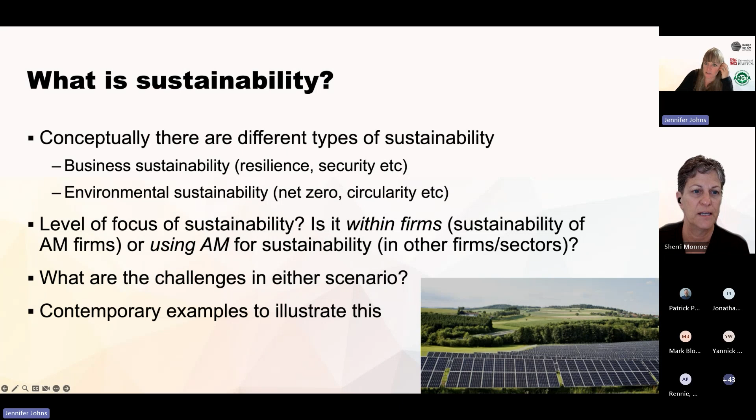I'm going to move on because we were also thinking about some of the challenges around this, and I think there's a certain inevitability about having to address some of these sustainability issues. It feels as if the world is on fire, but that doesn't necessarily always translate into positive outcomes in the business sense when businesses and sectors are under pressure. There's uncertainty around this, and there's certainly a lack of guidance. So if in any small way we can contribute to that and start a conversation around how we can have more meaningful conversations and debate around this, I think it would benefit the sector as a whole.

Sherri and I had a very interesting conversation around greenwashing, and I was very hardline, and I said, it's terrible, there should be no greenwashing. This is the term used by businesses who present green credentials that once examined quickly fold and are revealed to not be true. So there is this pressure on firms to present this sustainable impression. Sherry was actually much more encouraging. Go on, Sherri, you tell me your counter argument.

Yeah, so obviously greenwashing is an issue, when people are just kind of virtue signaling, oh, we want to do all these great things, but they don't really want to do it. I'm careful with the term greenwashing. I think what is one person's greenwashing is another person's just getting started. Sometimes you see companies going for that low hanging fruit, the easy things they can do to begin with, whether it's recycling water bottles in their facility or any number of things that some folks will say isn't really a big impact, but maybe it's just getting started and building a culture, getting people on board with thinking about things in this sustainable, more environmentally friendly way.

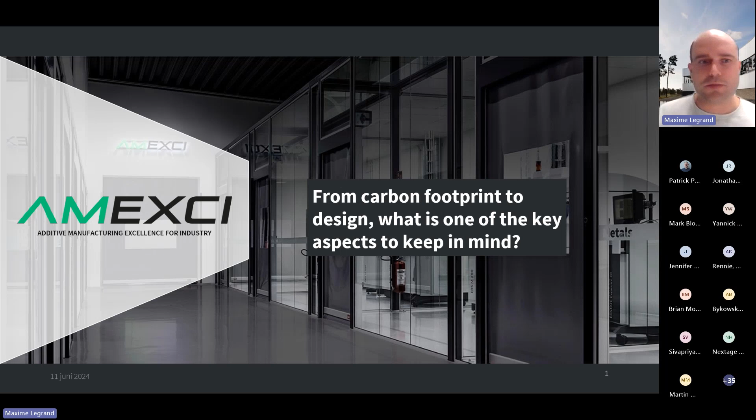I would say thank you first for this first hour, it was very interesting. So the theme here is about design and sustainability. What I'm going to talk about is, from the carbon footprint to design, what are the key aspects to keep in mind. But first, maybe a few words about AMEXCI and myself, for those who don't know who AMEXCI is. We're located in the Nordics, with the main office in Sweden, and another one in Finland.

So roughly 30 people, and we work with additive manufacturing. We have 3 different departments: one focusing on research, the second is the academy, which I'm part of. The goal of the academy is to train and educate people, basically help the customer walk along their AM journey, try to understand AM, find where to use it, etc.

So yes, that's where I've been working now for 3 years at AMEXCI as an innovation manager. And then the third department, which is the main one, is the production.

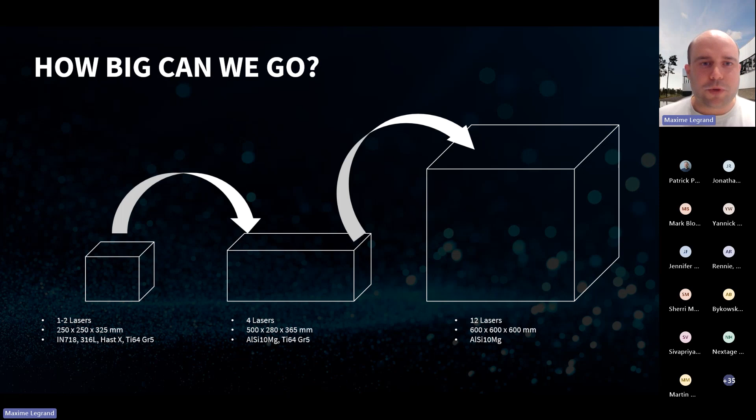I would say from the design and optimization process, and then prototyping, up to serial production. We have a few machines to help us on that, for smaller build envelopes, to print Inconel, 316L or Hastelloy X. Then we have 2 quad laser machines for aluminum and titanium. And we recently got a new SLM NXG with 12 lasers and a quite large build envelope of 600 by 600 by 600 to print in aluminium. So that was in brief what AMEXCI is.

So the goal I've set myself today is first to try to help you find some tools to help your decision in terms of environmental choices, not only based on economics, but looking also at other aspects. And then also to tell you what you should be careful about when you design for more sustainable products based on these tools.

So how to decide? As some of you mentioned before in the comments, the first question you ask yourself is, can I print it? Is it feasible? Which technology to use, etc. That's the first question. And then comes always the tough question, the cost. Should I print it? Does it make sense from a cost perspective, or on the lead times, the warehouse, etc. So try to find a bit the economical aspects.

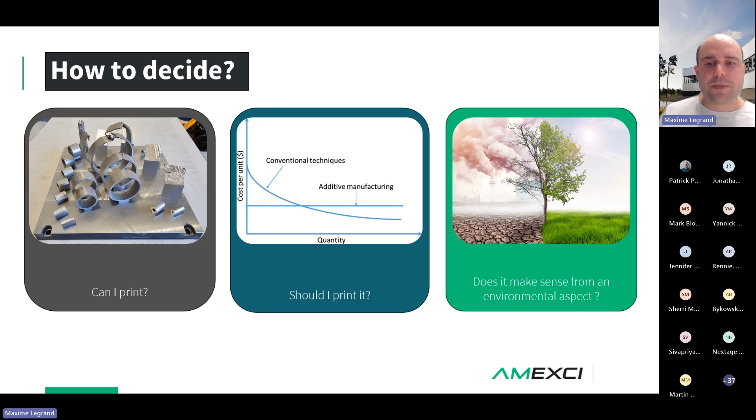But what we've seen start to appear recently is also the question: does it make sense from the environmental perspective? I would say that's also pushed by the oncoming CSRD, where companies have to do their own carbon reporting later on. That's oncoming. But to make sure it makes sense from an environmental aspect, we need to be able to measure it, to have some kind of LCA to measure that.

So life cycle assessments. I've highlighted a few companies in additive manufacturing that have LCA tools available. I'm not saying they are good or bad, I won't be judging, but just letting you know they are there, and you can at least get in touch with them to understand more. This list may not be exhaustive, it's just a few examples.

On the polymer side, there is BASF, which provides more materials in polymers. On the machine side, I know EOS also has their own tool for both polymer and metal, where you can measure the CO2 footprint of parts. Then also for both metal and polymers, we have these two independent bodies, AMPOWER and the Danish AM Hub, who've made some tools or studies on that.

And also, if we focus on metals, I found out recently that Aidro in Italy also has their own LCA tool. And at AMEXCI, we've also developed our own tool. Why develop our own? One reason is we found we need more data, more precise data, to be as accurate as possible.

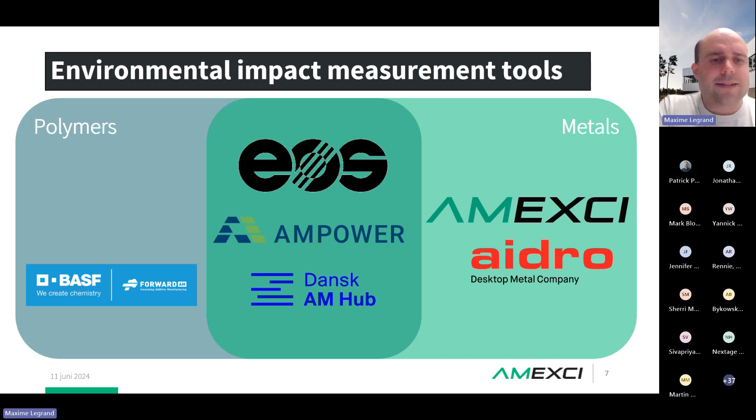So we started to do our own LCA, and that covers several aspects. We talk about circular economy, so several aspects. The first step is material extraction. That is covered by our LCA, but relies not on our own data, but on databases available online, etc. For that we haven't made measurements.

Then we have the manufacturing, and that's a key point of the LCA we've developed: we've taken the opportunity to put sensors on the machine to measure how much argon is used in the process, how much electricity is used in the process. So on that, we've made measurements, trying to be as accurate as possible.

Then transportation is of course covered by some database. The use phase is excluded because we don't have any power over that—the customer has more knowledge there. But I really encourage you to look into that phase, because that's usually where you can get the most benefits, if you think about weight saving and a part being transported from one place to another—the less weight, the less energy required to move it. So even though the usage phase is excluded, I really encourage customers to look into that. And for now, the disposal is also excluded.

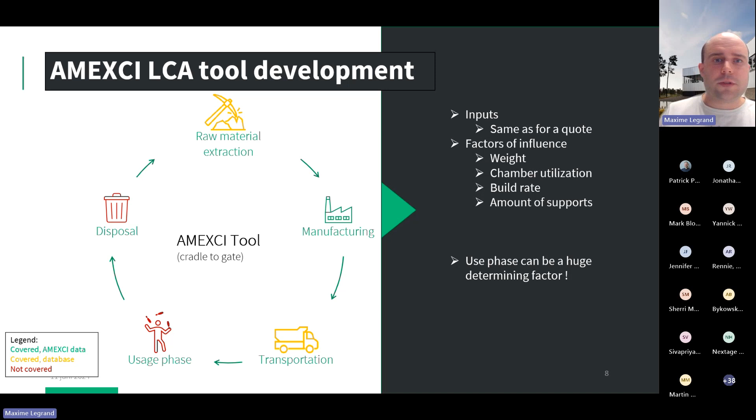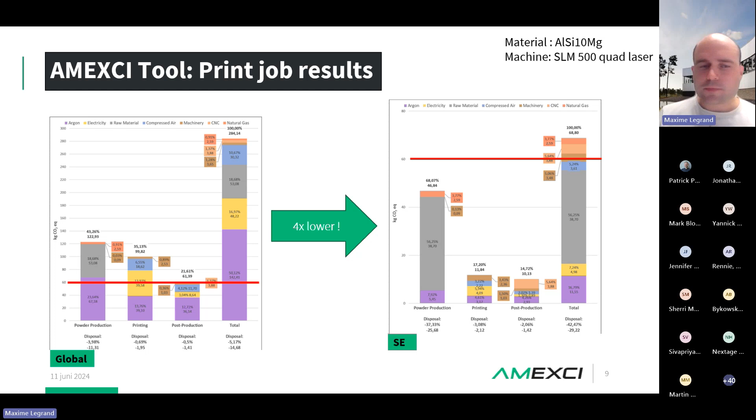But let's look a bit more at some results. So we did a print job. I cannot show it to you because this one was confidential. The material was aluminium, printed on our SLM 500 quad laser. From that, we used the tool that we developed and took the hypothesis of a global energy mix, and then we did the same with the Sweden energy mix. And we went down from around 280 kilograms of CO2 equivalent to a bit less than 70. So 4 times lower. So how is that possible?

For those who are maybe not so aware, Sweden has a very good energy mix, a very highly decarbonized energy production. So that's one learning from this: if you produce locally, in countries with this good energy mix, then you're already making quite intense savings there. So produce locally, and you get a nice energy mix, and also save on transportation costs. You don't need to transport using trucks, boats, or planes to somewhere else in the world.

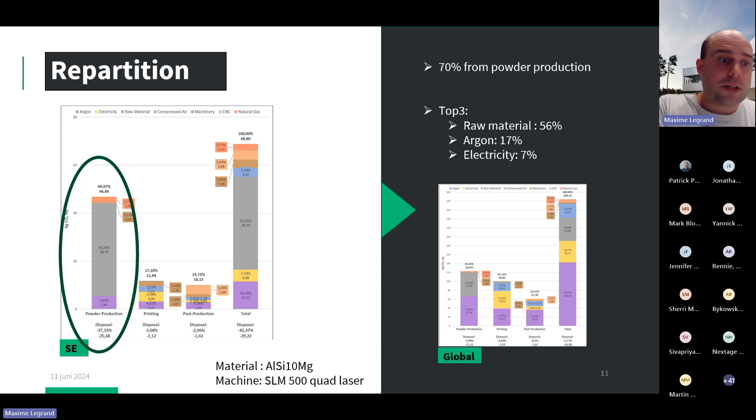And then if you look a bit closer at the Sweden graph, you see that the powder production accounts for roughly 70% of the kilograms of CO2 emitted. And if you look at the column on the right, you can see that raw material extraction is the main aspect there, accounting for roughly 56%, while argon and electricity are much lower—17% for the argon and 7% for the electricity. But if you jump back to the global one, you see that argon has a much higher impact there because of the way it's produced, maybe using coal, etc. So that depends a lot on where you produce. You have to be very careful about that—the results you have in one country will be different in another.

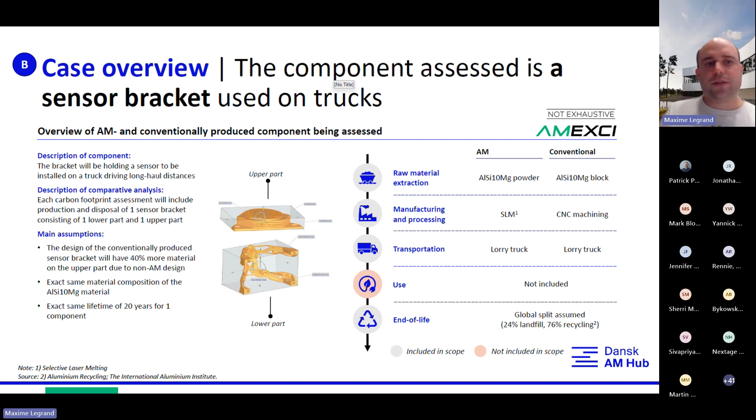But I wanted to say you don't have to trust only our tool on that. We did this work before with the Danish AM Hub, and another company specialized in LCA. They did all of this work based on database, and went through the same steps, more or less—raw material extraction, manufacturing, transport—and then they added also the end of life. That's to produce this bracket that you see there in yellow, and it was estimated versus a machined one. Of course, if you machine a block of 10 kilos of aluminium versus printing a part of 1 kilogram, you will see a huge difference in terms of carbon footprint. So this showed that in that case, AM was quite interesting because it saved a lot of material.

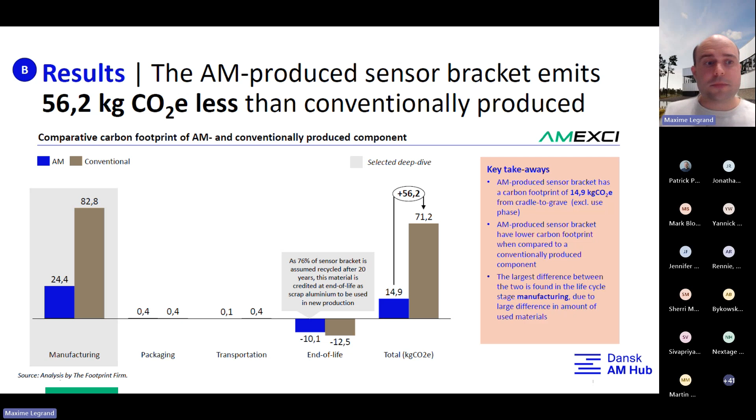And I don't know if you remember what I told you—with our tool, we got roughly 70% from the powder manufacturing. That's something you can see here also. Again, here, the powder accounts for around 75%. So this analysis also confirmed that the manufacturing of the powder is a major contributor.

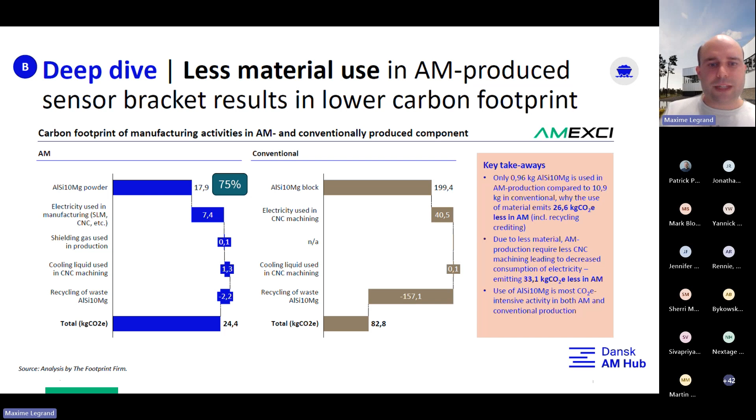So what to take away from that? Use as little material as possible. Try to be resource efficient. That will benefit you in all aspects: you will decrease the printing time, in a simplified way, you will also decrease the cost of your part, and you will also then lower the environmental footprint. So that's quite an interesting way to do it—try to use as little material as possible.

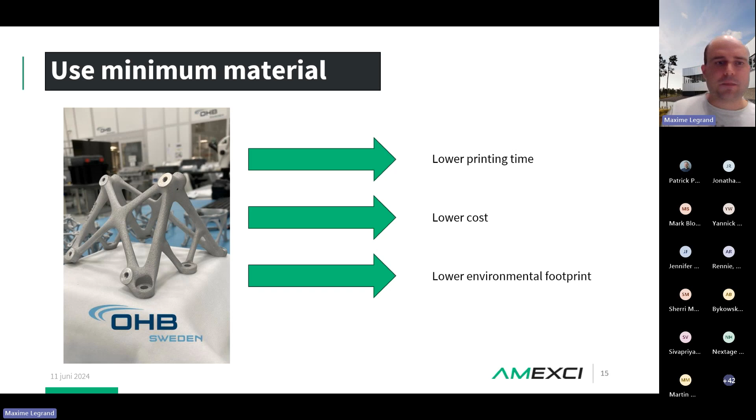So maybe for you to take away, there are some tools starting to be available and developed to estimate the kilograms of CO2 emitted when producing the AM part. Not so many yet—it's just the beginning, and I hope there will be more in the future, to be able to compare the data and make sure we get good results, etc. Don't hesitate to check with the local supplier what he has in his pipeline. And maybe it seems a bit obvious, but it's still important to know that minimizing the amount of material used is a sure way to minimize both cost and the environmental impact.

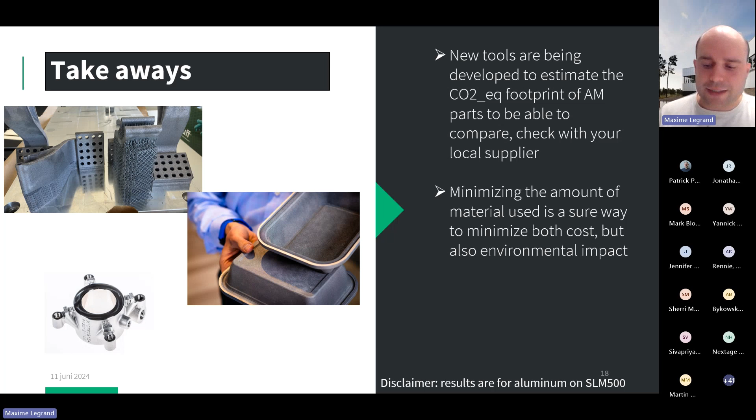Yeah, great presentation. Really good analysis that you all have done there. Opening this up, do we have any other questions?

Well, I'll throw a message or a question out there. What areas do you see that we need to get more primary data, or were you able to get data throughout that path, or was that still part of the challenge for you?

So from what I see, at least what is missing more on our side is we see that the material has a big impact, but for that we still rely for now on database. We don't have the data. So better information on the material, the powder production, would be a very good way to start, I would say, or to improve.

Excellent, excellent. Any other questions? Chris said, 'Wow, I need to go reevaluate our argon numbers.' Yeah, it is.

Go ahead. I was just going to follow on because your question preempted mine, really. I was really interested in what you were saying about the usage phase and having data from your customers. So it sounds as if you've done a lot of work internally around the numbers, but externally getting the data in is much more problematic. Is there any route to getting that data from customers, and how would you go about it?

Sure. Thank you, Sherri. I hope you can hear me. You can see the presentation. Yeah, amazing. Merci beaucoup, Maxime. And thanks for AMEXCI to start the presentations. Say hi to Merve and Manya also from my side. And let's kickstart. So now we go from a platform like AMEXCI with multiple technologies to 9T Labs.

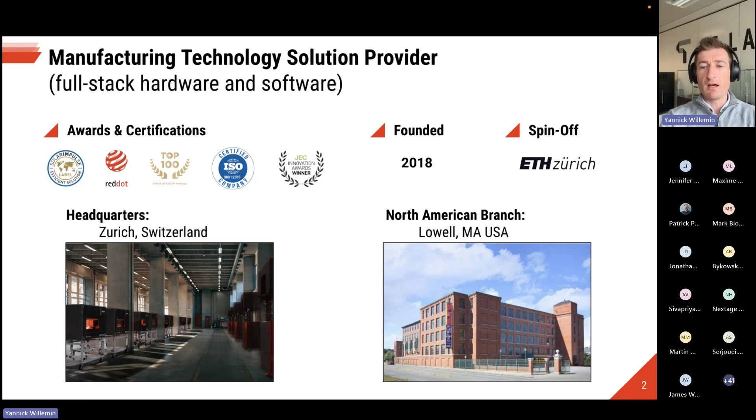So who is 9T Labs? Just very quickly, we are a young company, I'd say, founded in 2018 as a spin-off of ETH Zurich. We have our main site here in Zurich, Switzerland, with 40 people, and we have 5 people in North America, near Boston. And basically what we do, we started with the goal to really advance high performance applications. I will show an example afterward. But we really put a focus on sustainability, because nowadays, if you go into a factory for metal parts, you will see it's highly automated.

When you go into a factory for composite parts, which is normally associated with high performance, we know it from sports, from aerospace, you'd be surprised how many people are around and how manual it is, and tedious often. We see a point to make high performance materials in a high performance manner. The question is how can we make applications more sustainable without compromising this mechanical performance, which is mainly the goal of using these materials.

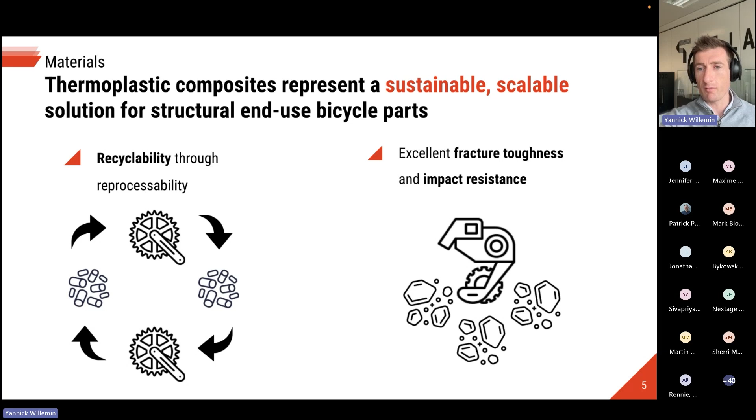On the material choice already, because there are different types of resins - a composite is a mix between fibers, in our case continuous fibers, and the resin. We are selecting thermoplastics because they have an advantage when it comes to recycling, or even during production, to keep the sustainability point, but also the scalability point, because we're using additive manufacturing for serial part manufacturing, a somewhat non-obvious use of 3D printing. Recyclability is a big topic by reprocessing material, end of life, or production waste material. And keeping the high performance is key for customers selecting this material, especially when substituting metal parts to get lighter parts at the same performance.

So that's in a nutshell what we're doing. We work on several pillars. We start at the digital pillar - we have software where, based on load case and geometry, we can define where to put these continuous fibers, which are very important for performance, but are also bad from a cost point of view and eventually an environmental point of view, because these carbon fibers mostly come from petrol-based materials and require a lot of temperature to get carbonized - that's why we call them carbon fiber - to reach their final properties. So we use them when they add value, but don't put them everywhere.

Then we can simulate and validate those parts in this digital environment, which is already part of making a product less negative, less impactful on the environment, because we don't have a physical item yet. Once it's verified, we go to an additive manufacturing step - that's one of the 3D printing pillars we're using, why we are here today. Here it's really about hitting the automation topic and the no-waste topic.

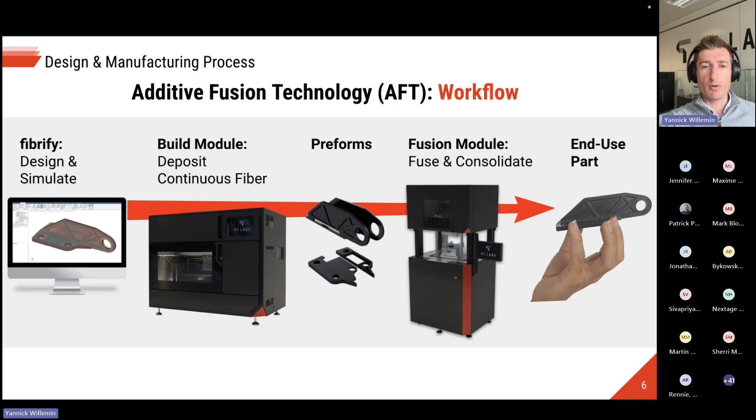So here we go - this is a rocker link for a motorbike, the link between the chassis, the suspension system, and the rear axle. We get this part in aluminum - this is how it is on the motorbike today. Based on the load case and the geometry given by the customer, we decide where to place these continuous fibers. As you see, we don't need a lot of them for this load case, just these two loops very precisely.

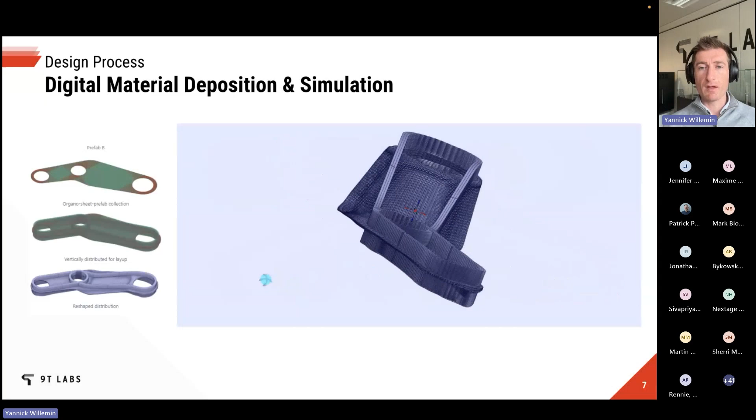And then we can even hybridize it with some other materials - can be short fibers to fill the volume, short fibers coming from waste streams, and also here an organosheet in the middle for torsion stiffness. So we place this digitally, and we can test it both for processability and for the end use case.

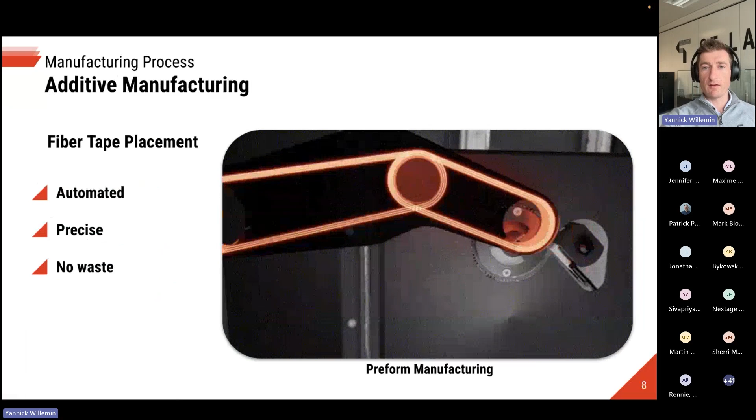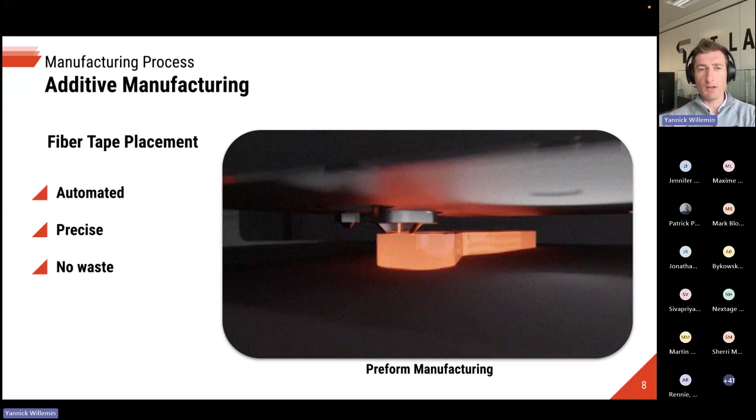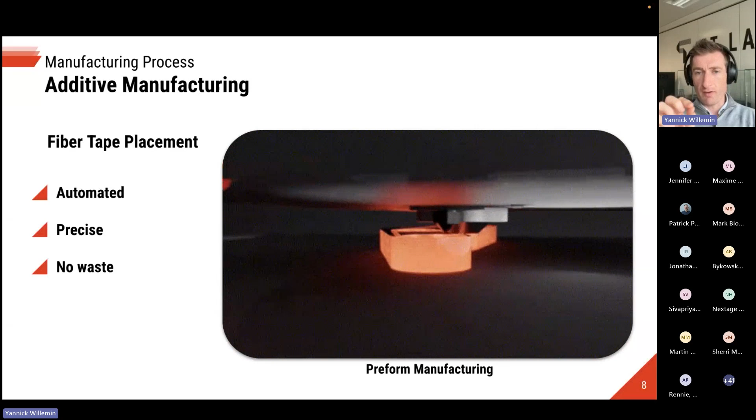Obviously once it's validated, we send it to the printer. The printer's goal - what we're looking for with 3D printing - is not to get a part that's perfect coming out of the printer. We want a very automated way to precisely place these continuous fibers without producing any waste, so we don't want cutouts or milling afterward. We do this very precise deposition here, and the end product is a preform.

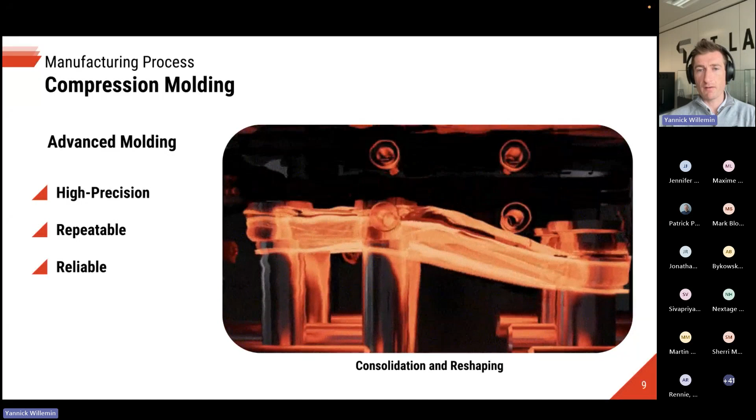And this preform afterward goes into a molding step. We go for high volumes, between 1,000 and 100,000 parts - we believe it's also a way to have a bigger impact, because we have 100,000 parts out there versus single parts here and there. Why we do molding is really to have this high precision - the highest characteristics for this type of material, the repeatability on tolerances and quality, and very reliable parts. Here we maximize the steps within one process - we consolidate the part, we reshape it, that's also an advantage of thermoplastics.

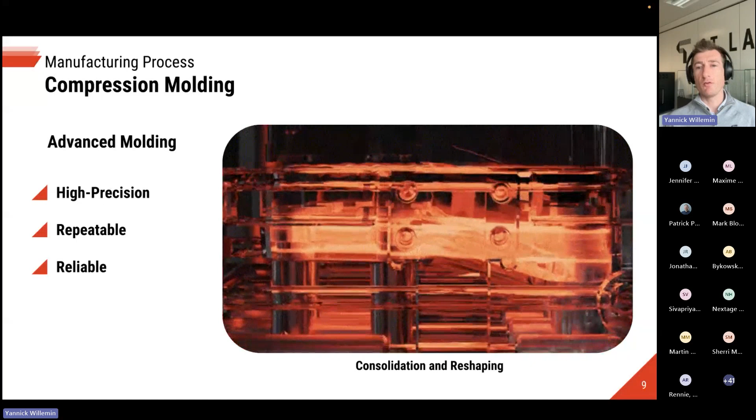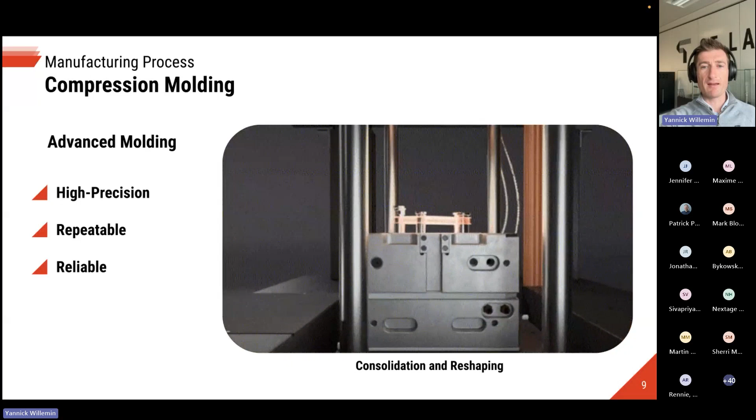And we can integrate metal inserts, which is often necessary for the interface, as a rocker link would interface with ball bearings and so on. So here we have the 2-step manufacturing. We add a 3rd step, which is the digital manufacturing before that. As I said, what we do is using 3D printing in a hybrid way. The goal, obviously the trigger for customers, is to reduce weight, which in the use phase has a major advantage on reducing consumption, increasing payload, whatever the incentive. We have that with 0 waste, which must be combined with cost competitiveness, because we are going for serial parts and often substituting metal parts like aluminium, where the business case is pretty tough when we look at cycling or aerospace.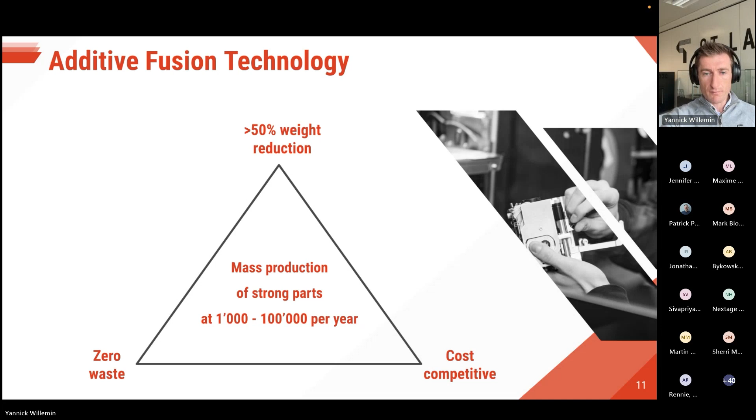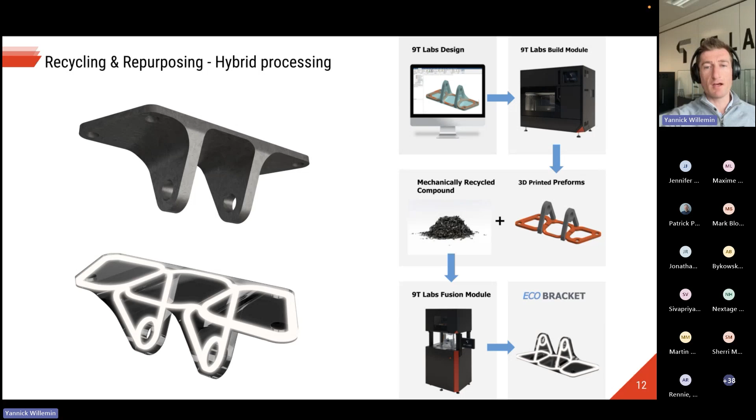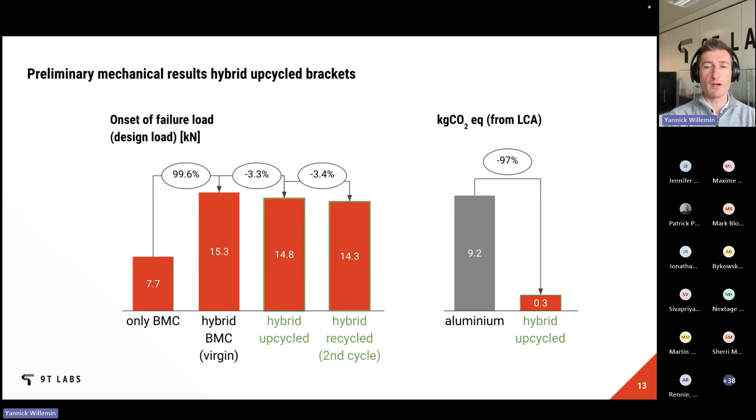And we did an LCA here with the university using commercial software in this field, comparing the aluminium parts with our concept. You see there is a dramatic reduction also on the kilogram CO2 equivalent, thus demonstrating that the concept, both in production and in use, has a major impact.

So yeah, in a nutshell, that's what we are doing now, and I'm glad that you listened, and I'm happy if you want to ask questions, challenge some of the assumptions. Your turn.

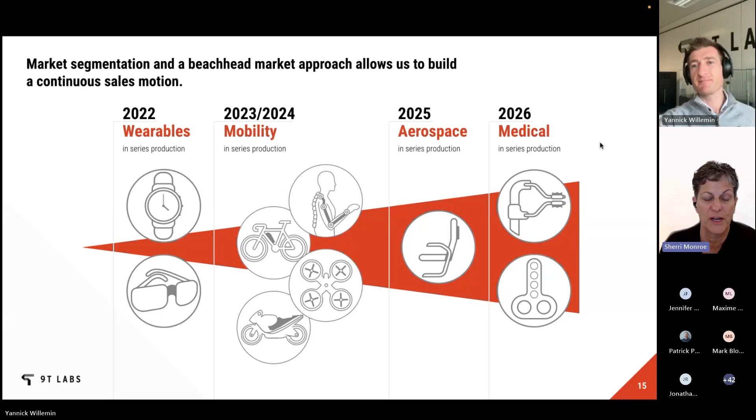Yeah, thank you. That was a really great presentation. What you guys are doing is really pretty remarkable in the impacts this is having, especially from your analysis there. What other kinds of, when you were talking about some of the wastes going in there, what other kinds of wastes are you able to make use of?

There's different waste streams. There is virgin waste, which would be at the material producers when they produce, for example, UD tapes with continuous fiber pre-impregnated with resin - they are always cutting 1 centimeter left and right, so this is very clean waste, we have no issue requalifying it. That would be option one. Second option is cutout - when a producer is buying these textiles and cuts out some of the surface, that would be reprocessed, also clean waste. The third case is end of life - we also took these brackets, shredded them, and repurposed part of them. That would be the third option.

Very interesting from the pitch, but very difficult to apply in aerospace, because qualifying a material end of life is pretty tricky. But for sport application it also has a nice case, I would say. So sports and luxury would be interesting. Aerospace is always tricky for whatever comes to recycling, because you also need to guarantee waste over 10 years, which is kind of counterintuitive.

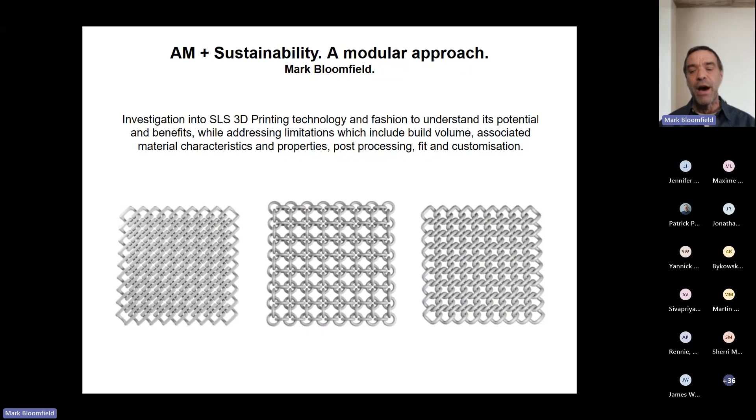It's also, once you've figured that out, how do you actually make it fit somebody? And when they try it on, how do you handle their questions when they ask, 'oh yeah, well it's nice, but it's a bit tight here, can you just let that out a bit?' So there were all these challenges we needed to overcome. One of the initial things we did was try to compress a pattern of a theoretical garment using physics to fit into the build volume.

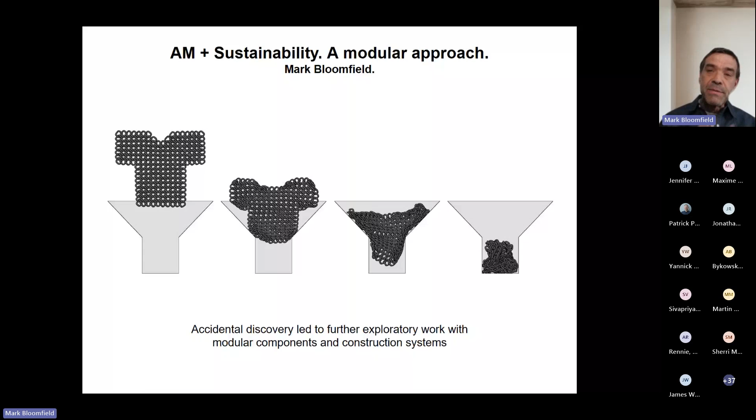So this works, it's something software can manage and do. But we had a problem because some of the links had failed in this simulation process and were no longer linked together. I was looking at it thinking, that's a waste, I've not got to throw that away. Then it was, well, maybe if I could just put these two links back together, click them together, that would solve the problem. So that's how Modeclix was kind of born.

I hasten to add this wasn't a sustainability project, it was really just looking at whether or not we could print clothing. The sustainability came as an afterthought, really, because we started to play with this and develop this link, which you can see on the screen. It's open on the back, so it just means these kind of small clover-like links can be linked together.

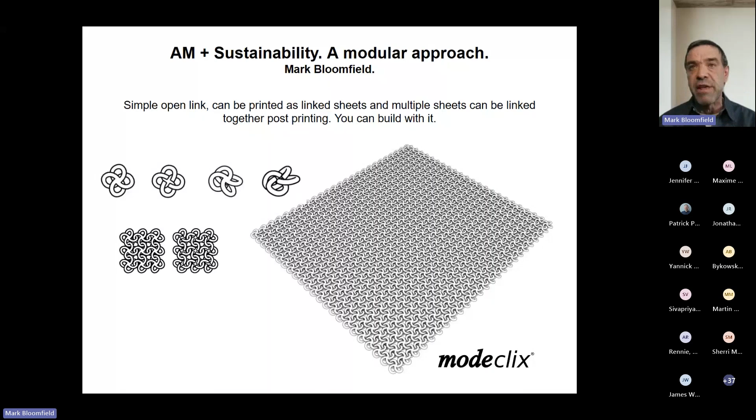They can be printed as linked sheets, so we could print large panels that just come out of the machine, shake them off, get rid of all the powder, put them through a vibro finishing process, and then start linking sheets together. So you can start actually building much bigger things with it. This is one of the first things we actually built.

Each of them have different body shapes, but we've not had to take the whole dress apart. We can literally just take links out and reshape it so that it fits pretty much anybody. So it began to introduce us to this idea that this was something we could tailor, and we could tailor it over and over and over again.

It was really fitting that whole circular economy model, whereby the material itself is something we can just print, and then continually find new use for. We don't ever have to throw it away because we can always reuse it. We then figured we could make new parts that could fit into this concept, so that we could expand its capability.

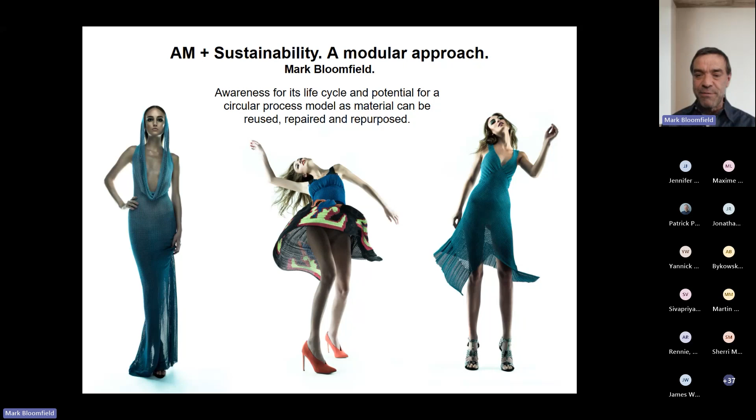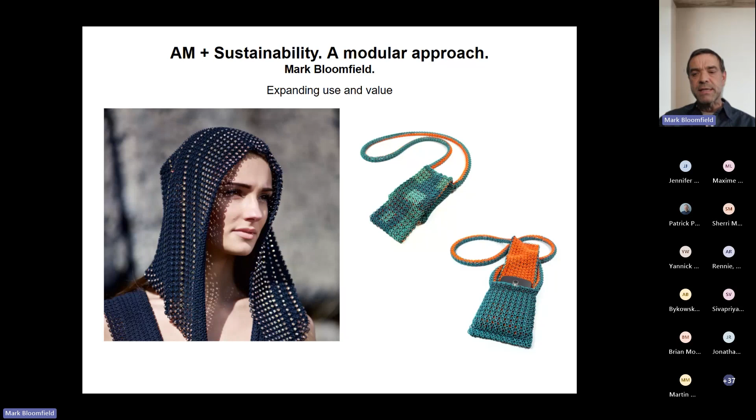And all along we're conscious of how we can take this material and reuse it, how we can turn it into other things. So we're always trying to extend its use, expand its use. But by doing that, we don't necessarily want it to cycle down the way whereby it becomes less valuable. It's how do we go the other way and make it more valuable.

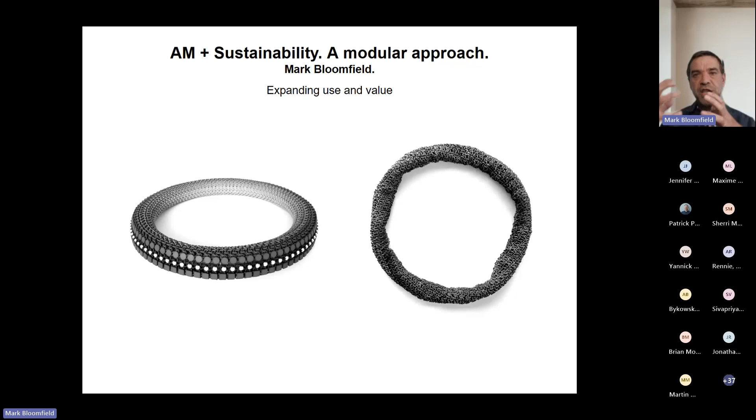So particularly when we start looking at jewelry, these are some ideas for making bracelets, but also explorations in terms of the mechanical properties of the material, and about how using those different components in different ways changes the rigidity and the structure of the actual object you're building.

This has become quite interesting. I did these for an art show, I had an exhibition up at the Lowry in Manchester. And some of these objects were made specifically as a result of playing with the material.

And they are odd in that they respond when you handle them. They're sort of interactive art objects, they're like sculptural forms. But they're also quite good.

We've had lots of requests from people thinking, well, this could be my new relaxation toy. And it's how, when you start questioning an object and feeling and responding to it in different ways, it also begins to engage the customer, engage people in these very important considerations around things like sustainability.

And about material use, it's getting people interested in, everybody has a question about how is this made, how do you get it to do that. And then talking about how we can take it all apart and turn it into something else, light bulbs go off and they feel like, oh yes, they get it.

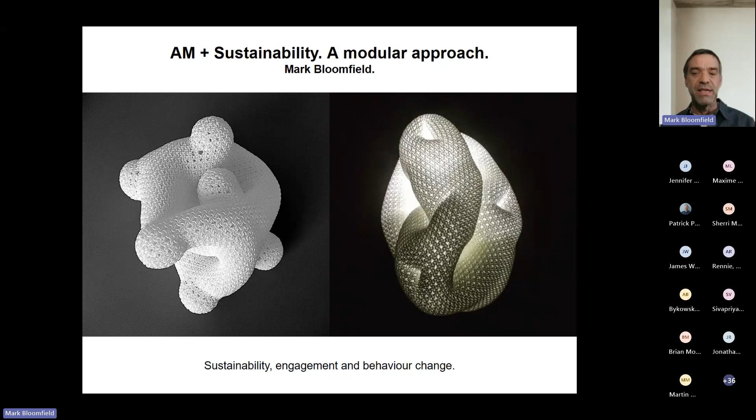So it's been a really good vehicle for beginning to talk about those things. And also, I think sustainability is one of the main barriers, and one of the biggest things is that ultimately it's all about behavior change. It's about us looking at what we currently do and how we can change those mechanisms for the better in order to begin to solve some of these problems.

I put in there a little challenge because one of the things I'm getting is that it's still plastic. So this is still a challenge, where plastic at the moment is having a real hard time, because it's something customers understand only as one thing rather than a full spectrum of different materials.

And also, because I'm using a powder-based system, it's the powder, you know, it's a microplastic. Bureaus have got a lot better though. I think the last order I got in from 3D Print UK was powder free, I was pretty impressed, there was absolutely nothing on it, which is really good. So I think there are some things happening in that instance, but there are some quite disastrous ways in which that could be interpreted if something's not done about it.

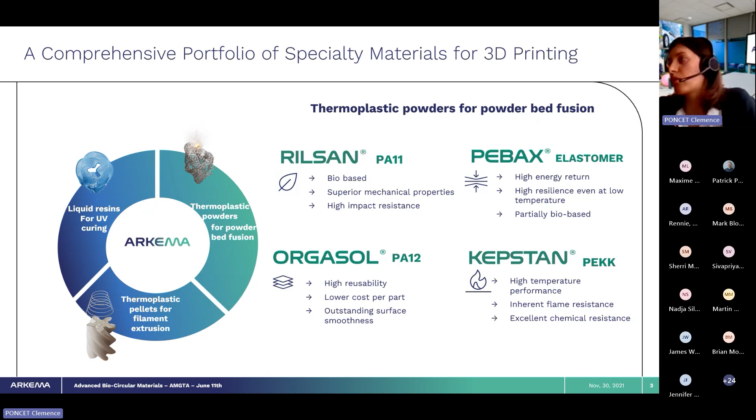And if your application is very demanding in terms of temperature, for example, we have what we call Kepstan, a very high performance material.

As I said, PA11 and Pebax are partial. PA11 is bio-based, Pebax is partially bio-based, and it's derived from the castor plant. How does it work? We take the castor plant, collect the beans, then crush it into oil, and at Arkema we have the knowledge to make from the oil the monomer, amino 11, and then polymerize into polyamide 11, giving us the powder for 3D printing.

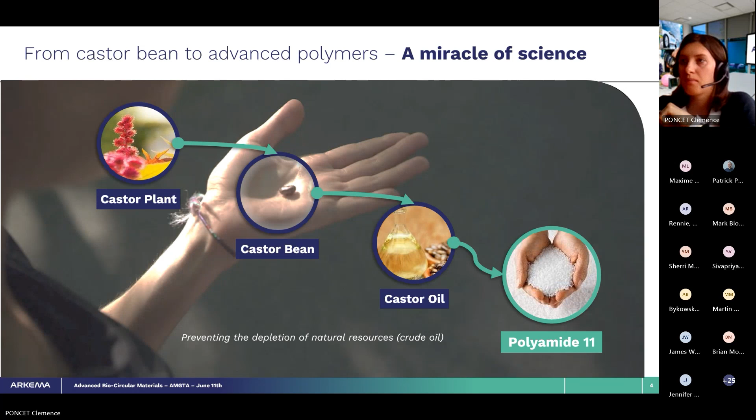Why using castor is very interesting: those beans grow mainly in India, in the Gujarat region. There is no competition with food because it grows on marginal soils, meaning nothing else could have grown there. So there's no deforestation, and it's seen as an additional source of income for farmers in India, who do it in addition to their main activities.

Also, when they collect the beans, about half goes to oil and the other half is used as cake, which is also sold as fertilizer. So there is no waste.

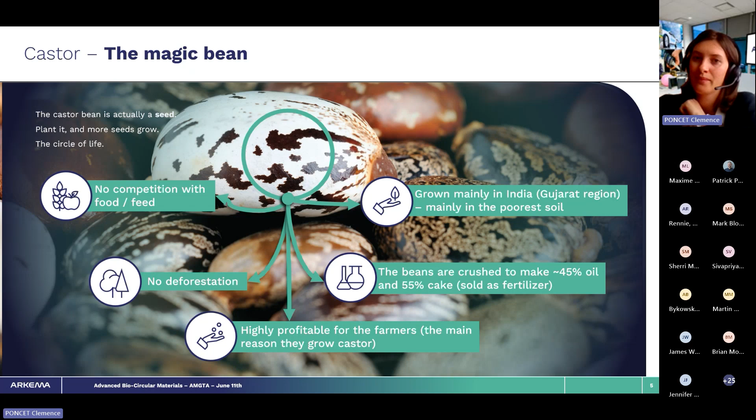How can we translate this into numbers? Going back to what was said earlier about life cycle analysis, what we've decided at Arkema is to show the numbers: our PA11 product is below 2 kilograms of CO2 per kilogram of product. Compared to a fossil fuel polyamide, since it's bio-based, and having recently signed a huge bioenergy contract in France, our carbon footprint of PA11 is 17% below fossil fuel-based polyamides.

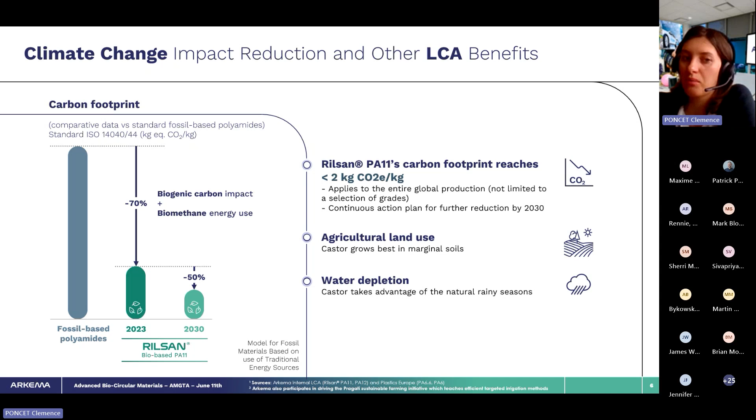We also have the target to always improve ourselves. By 2030 we aim to propose a PA11 that is below 1 kilogram of CO2 equivalent per kilogram of product. This is very challenging, but we'll make it.

To show that what we're saying has been recognized by other third parties, we've recently been certified, and we're very proud of it, by Solar Impulse, an NGO that certifies sustainable solutions. We're very proud because it was a very long process - they assessed the entire value chain, and this recognition shows that what Arkema is doing is really beneficial in terms of sustainability. This label concerns polyamide 11 and also the Pebax elastomer I mentioned earlier.

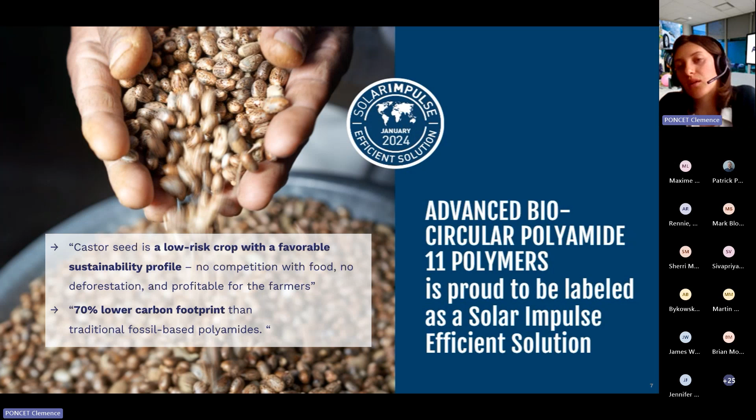One last thing I want to emphasize: Arkema is committed. We manufacture polymers, but we're also committed until the end of life. We invested in 2021 in a company called Agiplast, based in Italy, which recycles old powders, used parts, or scraps mechanically so they can be reused. This means Arkema is committed from the manufacturing side until the end of life of the product.

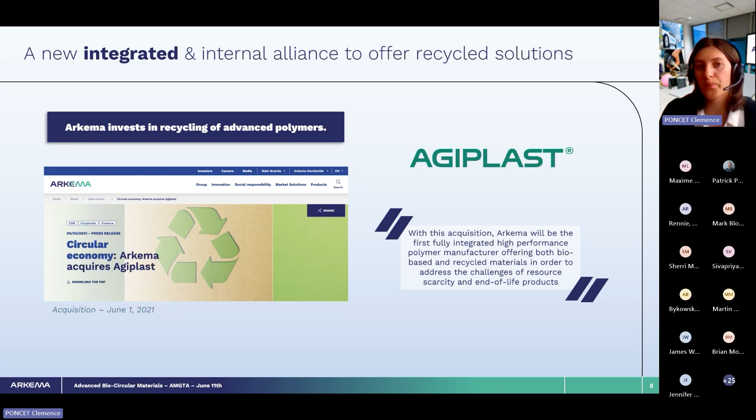How does it work? If we deep dive into the polymer 3D printing area, Agiplast collects either used powder from additive manufacturing, used parts, or scraps. They bring everything to their manufacturing site in Italy, and mechanically reprocess it into injection molding grade material that's reused in different markets - as we can see on the slide, in a saddle, a shoe, or something else.

This is something we're also very proud to show - that Arkema is committed across the entire value chain of the polymers.

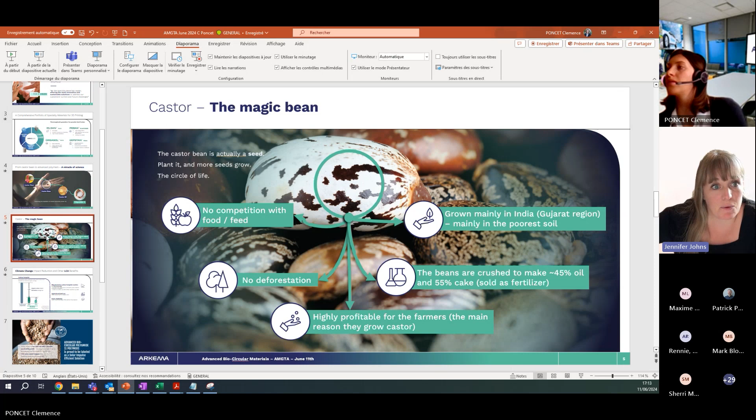Alan is asking if the recycled reprocessed powder is lower quality, hence going to molding rather than reuse in AM. So the powder we collect is not reused directly. It will be reused in the molding process, but the know-how of Agiplast is to do a compound with new powders, so it means that at the end the quality will be the same, whether you buy recycled grades or a grade that's 100% new, if I understand the question well. And all of those recycled materials are coming into one site in Italy? They're going into injection molding only, or extrusion, but not back into additive manufacturing, because as you all know, the quality of powders needed in additive manufacturing is very high. So as of today, we prefer to use it for injection molding.

Okay, and the recyclable materials are coming in globally into the plant in Italy? Yeah. Okay, interesting.

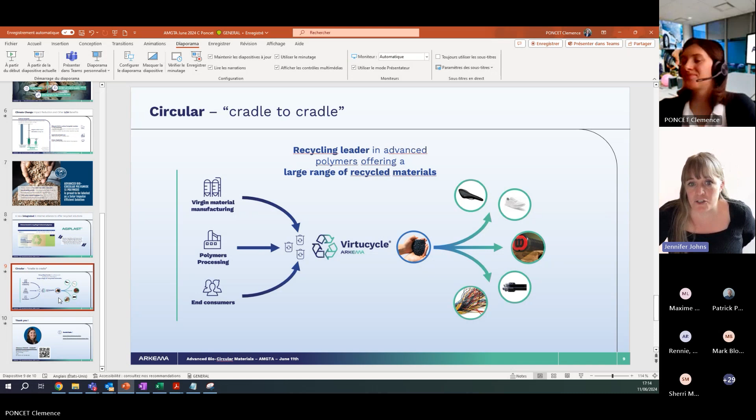Hi Brian. Hi, how are you? Good, thanks for joining us. Absolutely. Can you see that okay? Brilliant, yeah. So continuing our focus on materials, I'll hand over to you, Brian. Thank you, yeah, thank you. So yeah, thanks for the opportunity. Like Sherri, I am actually located here on the east coast of the US, so good afternoon to everybody there in Europe. And again, thanks for the opportunity.

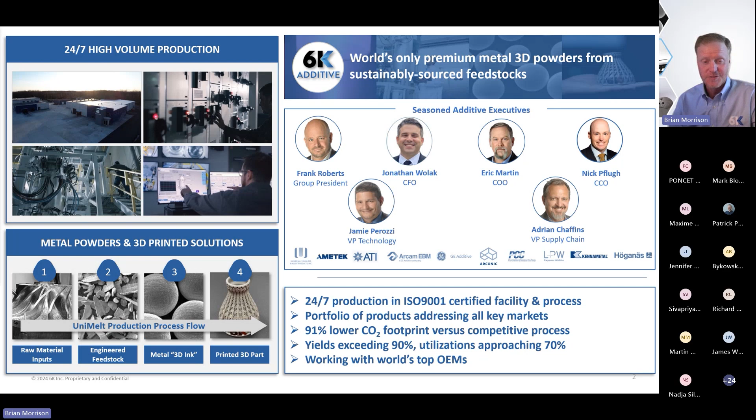I'm going to talk about 6K Additive, and I'm the director of sales here for North America. So quickly going through this, since we have 10 minutes, a little company overview: we are a producer of metal powders, specifically for additive manufacturing, from sustainable feedstocks. We operate 24/7 with a technology that supports lower CO2 footprint and higher yields, and I'll get more into the technology we call UniMelt, a plasma spheroidization technology. The company is a little over 100 people in our division at 6K Additive. We're headquartered in Pittsburgh, Pennsylvania, with other locations in the U.S. and a team also in Europe. We are also part of the AMGTA, so we're proud to be a member of that.

So like Arkema, this is actually it was a good lead in to my presentation.

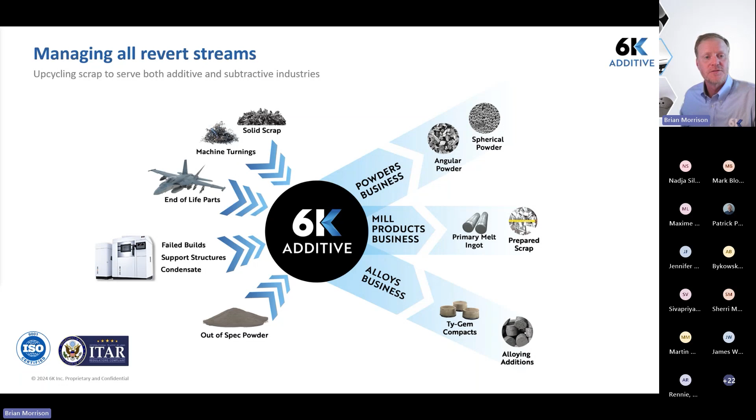So within that, it comes into 6K. We do a lot of vetting, which I'll talk about, and it can go into our powder business, either coming out as an angular powder or a spherical powder, spherical being the powder we sell into the additive manufacturing market. If it cannot go into that value stream, we'll put it into a mill product. We can actually remelt that revert into an ingot or prepare it as scrap to do that. Or it goes into what we call our alloys business. These are titanium compacts used for alloy additions in the aluminum melting market. So whatever comes into 6K Additive in terms of revert goes out as a product.

So what I'll be talking about for the rest of the presentation is our spheroidization process and the sustainability initiatives we have with it. The UniMelt was spun out of MIT back in 2008. It's a plasma-based process generated by a microwave. Why that's important is, compared to other plasma technologies, it has a very uniform plasma plume, so the temperature is very uniform within the plasma. This matters because as we pass the feedstock through, as you can see in the top left there, which could be irregular in form, it's all exposed to that very uniform plasma plume, which is over 6,000 degrees Kelvin, hence 6K.

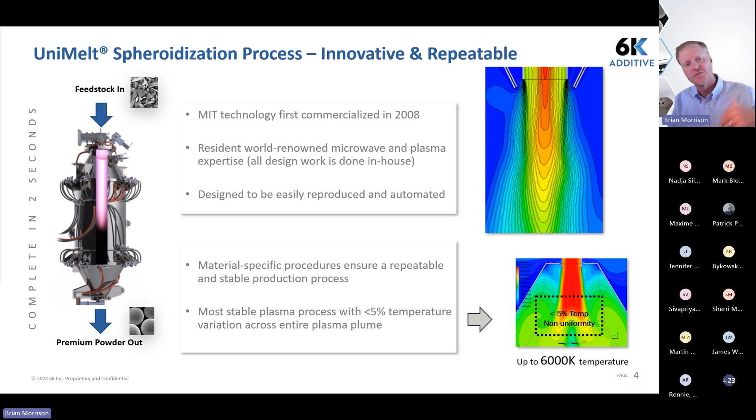It will actually spheroidize the irregular material into a spherical particle, which you can see there on the bottom left. So we have a very high yield of the revert materials that we're preparing that go into the spheroidization system and come out as premium quality powder.

So we size it into what we call an engineered feedstock. It can look irregular, or it could be a little more spherical depending on the raw material being used. Then we pass it through the spheroidization system to yield powder that is spherical in nature, fit for use in additive manufacturing. There are over 31 quality checkpoints throughout the process as we go from raw material to finally certifying the powder for use.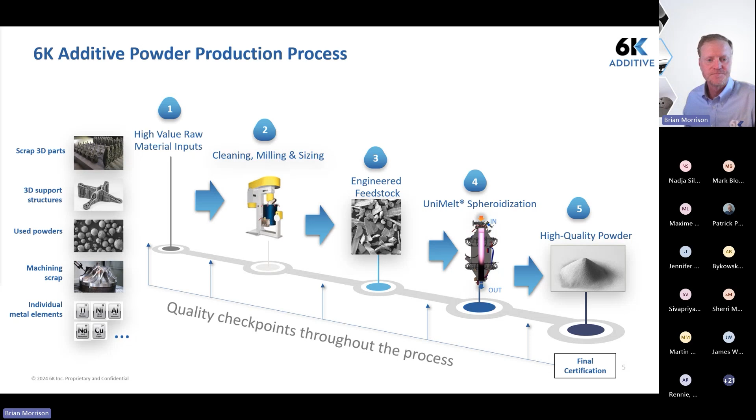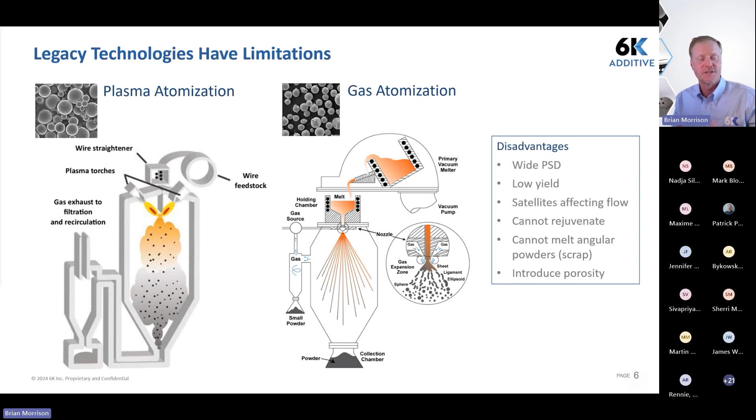When talking about sustainability, I do want to compare our process to other processes out there. Things like plasma atomization and gas atomization have some challenges, just like any technology—things like wider PSD, lower yield, and some morphology challenges when it comes to the metal powders produced from this process.

Also, as I mentioned, the atomization process produces a very wide distribution, so the yield of usable powder can be low. This generates waste that sometimes can be remelted, applying more energy, or simply scrapped, or stored in inventory. At 6K, we can actually use some of those waste products to produce the sized material we're looking for through that milling process I spoke about.

As we pass it through the UniMelt process, again, what goes in is what comes out. You have a very high yield, up to 100% of material going through the unit, and it's very tunable, as we are fixing the powder size distribution up front before the production cycle.

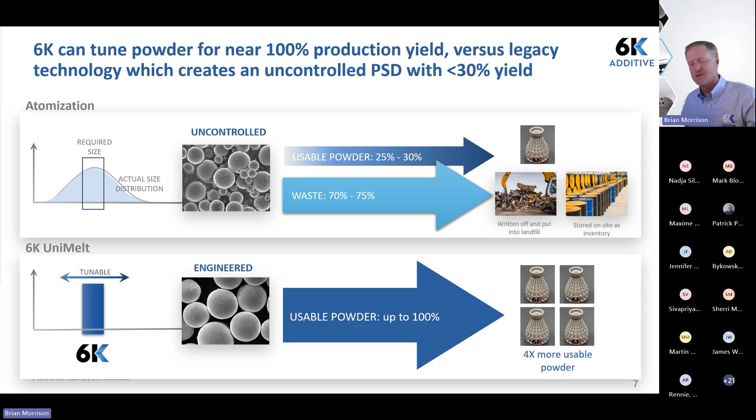So here's a little bit of what some of the raw materials look like going in. You see things like 316L, which is a stainless steel material. This would look like a used powder that was used by an additive manufacturing OEM or contract manufacturer that we would purchase back and then pass through our system.

The nickel 718, which is a nickel-based superalloy, would be like engineered machine chips or swarf that could be passed through the system to be spheroidized. And then the last there is a titanium alloy, very popular one, Ti64, that's used in a lot of biomedical and aerospace applications. This is irregular material that was milled from a solid initially, and then passed through the system to again make a spherical powder.

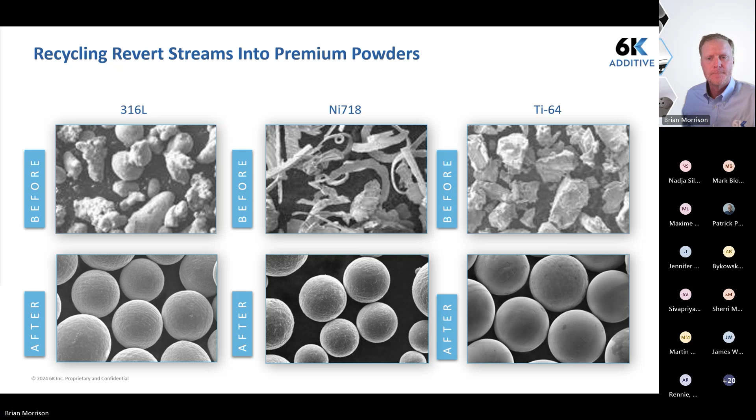A little bit about the product offerings we make from sustainable raw material sources. Things like nickel alloys, 718 and 625, used in aerospace defense applications predominantly, also in different energy applications, whether it's oil and gas or land-based turbines. We produce a lot of titanium 64, used in aerospace and defense applications, but also medical applications. And then a wide variety of very specialized high temperature, high performance alloys like niobium alloys, tantalum, tungsten, moly, and rhenium. The flexibility of the system, going up to 6,000 degree Kelvin, we're able to melt anything from a low melting point material like aluminum to very high melt temperature alloys like tungsten. So a wide flexibility in the system we have.

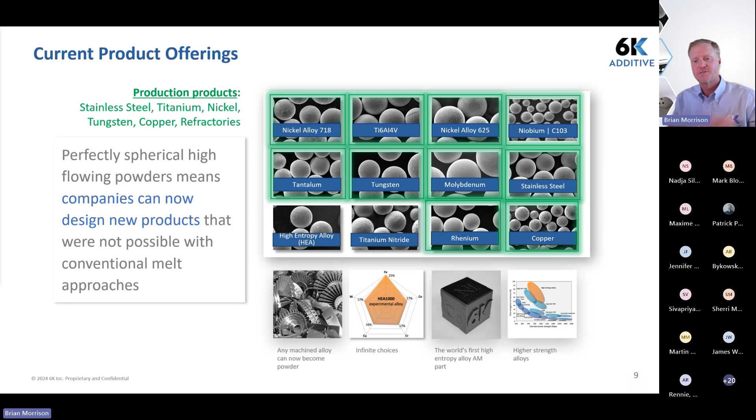So a little bit on the sustainability. Our initiative at 6K is really to significantly lower the landfill material, taking a lot of these waste materials that would otherwise be scrapped and being able to upcycle them in our process, and significantly lowering the energy consumption and CO2 emissions to be able to produce powder for additive manufacturing.

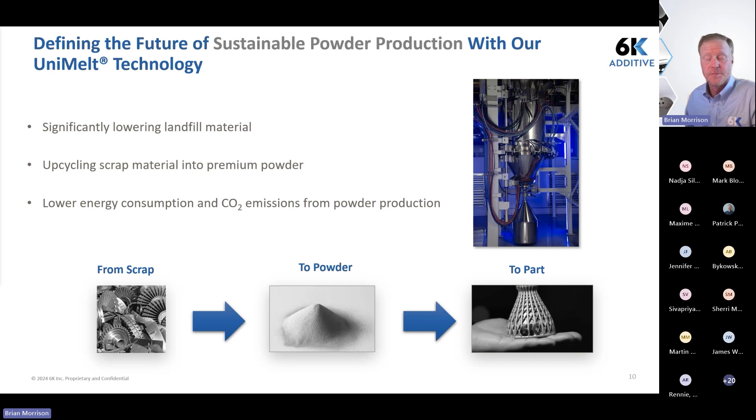So we have done a life cycle assessment, heard that several times today. We've done that on both our nickel production and also our titanium. On the left, you can see the nickel side, a 91% reduction in energy use and a 91.5% reduction in carbon emissions throughout the entire process. This was a third-party assessment done by Foresight, and we're happy to share that white paper, which can be downloaded at our website. Also, you can see for the titanium side, it was roughly a 70% reduction in energy use, and almost 80% reduction in carbon emissions compared to other titanium powder production processes.

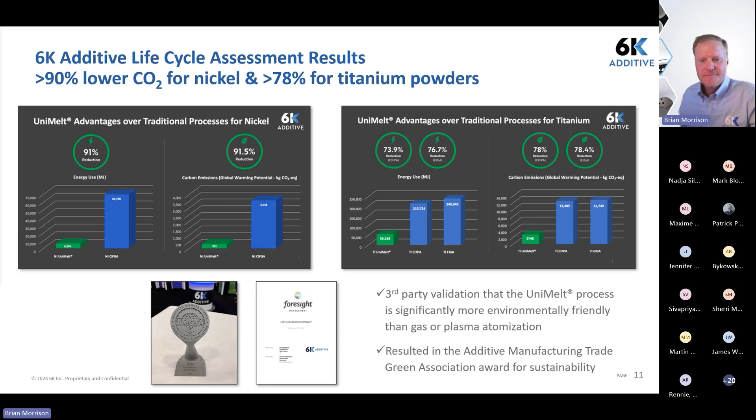So that was a quick run through of what we do at 6K Additive and how we source sustainable raw material to utilize our plasma spheroidization process, our UniMelt process, to make fit-for-use powder for additive manufacturing. Happy to answer any questions you guys have.

Brilliant, thank you, Brian, and an award from Sherri, no less. Should have. Yes.

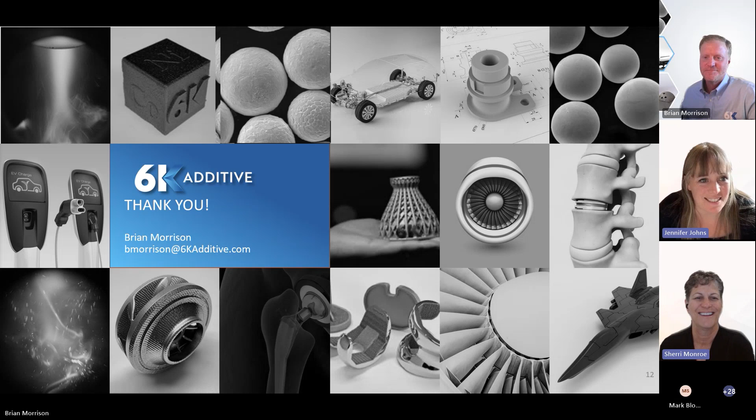Maxime asked: how do you make sure you have the right chemical composition? How do you deal with potential contamination by different alloys? Yeah, it's a very good question.

When we're sourcing raw materials, we bring them in and go through a very rigorous process. First, we measure the chemistry just by what we call an XRF gun, we'll shoot it to see if it has the correct chemistry we're looking for. If it does, then it goes through a more intensive vetting process at our approved lab on site at 6K. At that point, we're also testing things other than just the chemistry. And then even furthermore, we'll do other blends of material to ensure that it's homogeneous before putting it into our production process. So there's more than 3 checks of the chemistry before it goes into our production process internally.

What about water-based atomization? Wondering what your opinion is and whether you've worked on it.

Yeah, so being in the additive manufacturing industry for a little while now, I know there's been a lot of work on water atomized powders. It tends to be either gas or plasma spheroidized or gas atomized powders that have been used traditionally, and it's usually based on the chemistry requirements for the end-use customer. Water atomized powder in some cases can have more irregular particles, so flowability can be a challenge, and oxygen content can be a challenge. We have utilized those raw materials to run through our system to spheroidize them, improve the morphology, and lower the oxygen content as well.

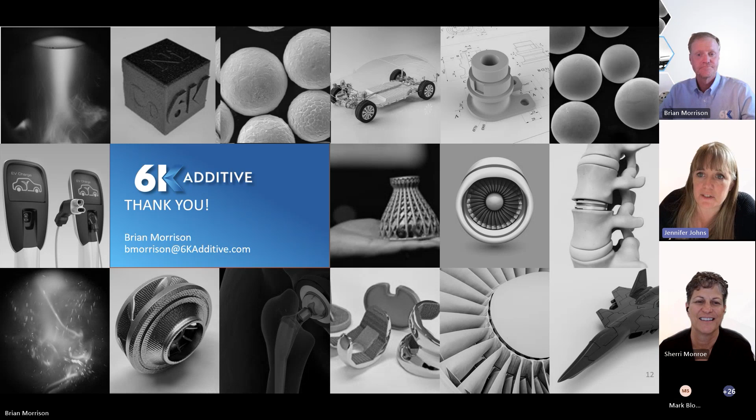Hi, Milo. Hello, everyone. Thanks for joining us. Yeah, thanks so much. I'm pretty sure that when I share my screen, I'm not going to be able to see anyone, so if I start a tangent or something, just bear with me. So I'm here to talk about Batchworks. Thanks so much for having me on. I think my presentation is going to be slightly less technical than the two previous.

Batchworks is a manufacturing company that's using additive to really leverage ideas about circularity. Let me just share my screen. Here we go. Okay, can you see that? Yes, we can. Thank you.

Okay great, so Batchworks is a design and manufacture company which is really focused on leveraging ideas about circularity and distributed manufacture from its very core. We've been going since 2017. My business partner, Julian, he is trained as an architect, and he was really interested in this idea of distributed manufacture and how digital production technology can sort of bring manufacturing back to the city. He set up a sort of small farm of 7 3D printers in a shipping container in East London, and initially was just really focused on this idea of local production using this technology.

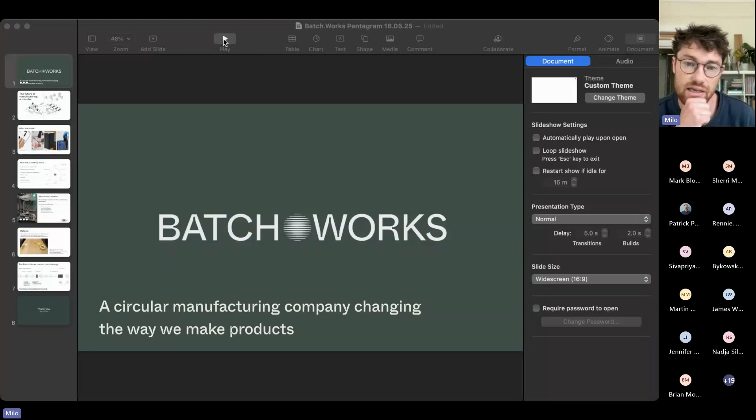Knowing that he had some 3D printers, we, over a weekend, put together a really efficient design for, I'm sure you've all seen those 3D printed visors. We managed to put together a design that took 10 minutes to produce, and over a series of weeks managed to produce 10,000 items of PPE for a local hospital in London, directly for the NHS.

All of those units were delivered directly by bicycle, and we were using recycled PET from a company in the Netherlands. For me, that was a huge light bulb moment for this technology, because we'd managed to answer a need. A supply chain was broken, and we were able to use digital production to take up that need, quickly design a product which would fit the bill, and deliver really locally with this technology, creating this really nice small material loop.

Towards the end of delivering those parts to the hospital, we started working with them on how we could recover the visors after sterilization and have them returned back to us. This created for me this really beautiful idea of a very localized manufacturing hub where we can create these small manufacturing loops. And because it's digital, we started to dream of how this can be networked and distributed across multiple locations.

So from here, Batchworks in its current format was sort of born. Julian and I started working together on really realizing this idea of distributed manufacture using digital production technology and how we can design products specifically for circularity.

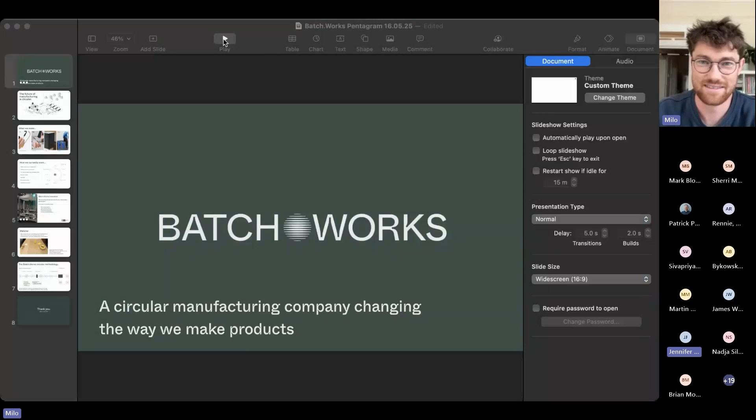So Milo, sorry to interrupt, your slides aren't moving forwards. Oh, really? Yeah, I think we're missing some imagery. Are we on? Does it say what we make? No, we're still on the first page. Okay, there we go, apologies. Can you see now? Yes, everything you said made sense without the slides, but as you made them, it'd be nice to see them. Thank you, can you see? Yeah, this I can now see what we make. Okay, great.

Apologies. So Bene, that's the second image there. For them, we make accessories for their office furniture. They're really simple monomaterial objects, but they work really well.

For Bene, that was an opportunity for them to really lean into this step towards a more sustainable way to manufacture goods. They're a traditional furniture maker that manufactures tables for offices around the globe.

What was really interesting about this project was we were working with a UK design company, and we were able to lean into all the other benefits of additive manufacture. Rather than having to stick with one form factor like you'd maybe have with injection molding, because you're relying on an expensive mold and taking a risk with the mold manufacturer, with additive they were able to design 30 different form factors, offered in 10 different colors.

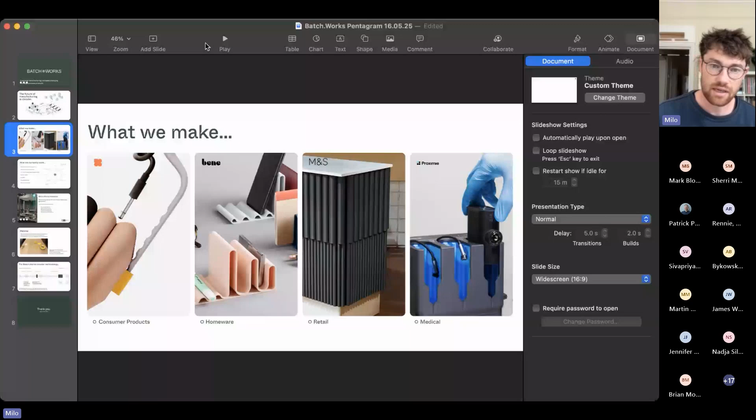Okay, I feel like I've given you a bit of a whirlwind there. I was talking quite quickly, but yeah, so that's a sort of introduction to Batchworks and our circularity system.